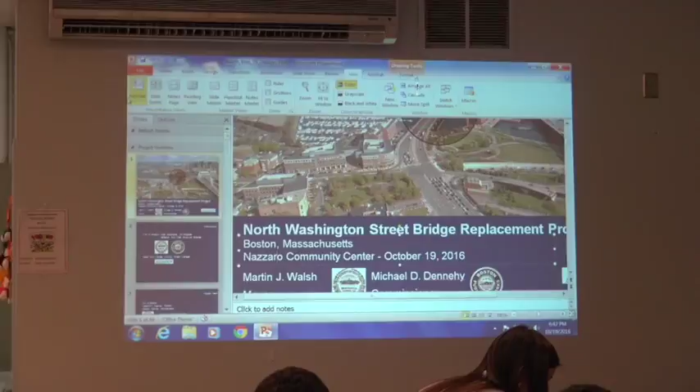So let me start showing you some slides. It takes a trained person to operate these things. Left and right, left and right.

All right, North Washington Street Bridge. The project limit is from the Keany Square intersection to the City Square intersection at Charlestown. This project entails the replacement construction of a total 1,500-foot bridge.

The span we're replacing is about 1,100 feet under this project, and this bridge has been in service since 1898. It has been loyally serving the citizens of Boston for the last 118 years.

Obviously, with that age, this structure is somewhat exhausted, and it's evidenced when you are traveling on the bridge. You can see concrete patches, steel plates, traffic drums and cones.

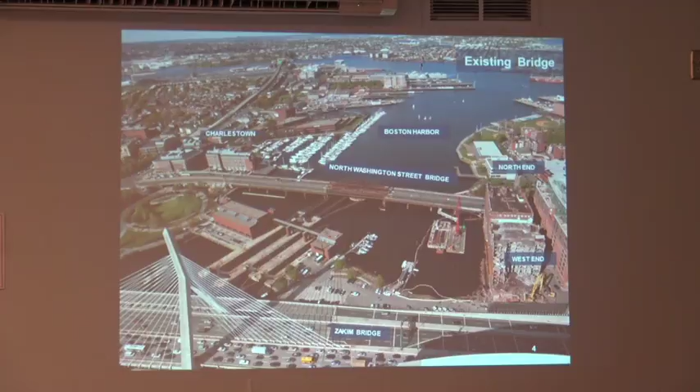Unseen by the public eyes are steel structural members below the bridge deck that support this structure, and they are also in a very deteriorated condition. So we monitor the structure almost daily. As a matter of fact, we have a crew out there doing repair as we speak tonight, and a bigger steel repair contract was advertised on Monday. We're going to keep the structure working until the bridge is replaced.

So it's basically a structure that we must replace. As a result, the city and the Public Works Department's utmost goal is to get this project under construction as soon as possible. Right now, we're targeting next year to have the construction contract going.

The project goal is pretty simple. If I can put it simply, we're designing the replacement bridge for the next 75 to 100 years. As a result, we're projecting what we will need in the next century as the bridge serves future generations.

So now I would like to turn this presentation to our design consultant, who will go through some of the details of the design and the comparison between the 25% design and the currently 75% design level.

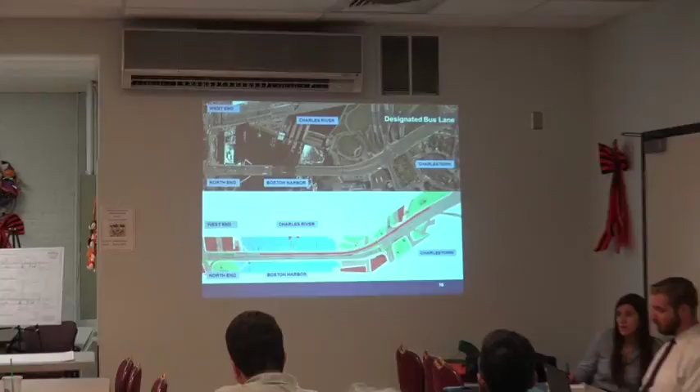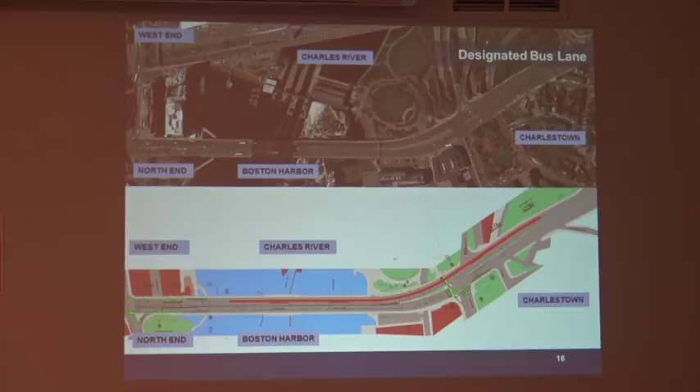So within our project, we widened the bridge roadway slightly and narrowed the sidewalks a little bit from where we had them before. That allowed us to add a bus lane starting 500 feet north of City Square and ending 500 feet north of Keany Square. City planners can take this and build onto it, extending south and extending north.

These slides are to relay where the bus lane starts and why we started it there. This is the City Square tunnel coming off north of the bridge. Currently it's 4 lanes going south, and then you add 1 more or 2 more coming off the Tobin Bridge.

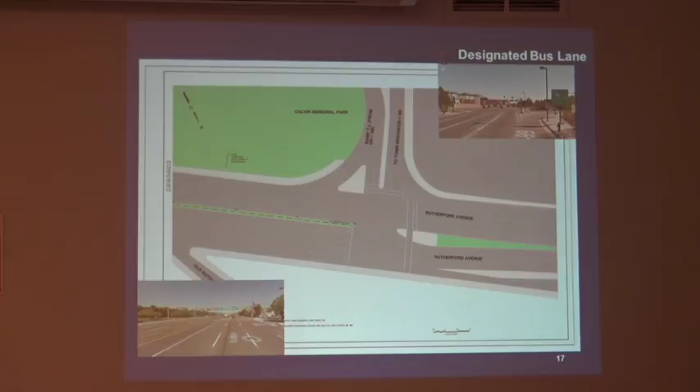So then we hit this point, 500 feet north of City Square, and we force people to make a decision at this point whether to go straight or go to the right lane. It gets the cars in line where they want to go.

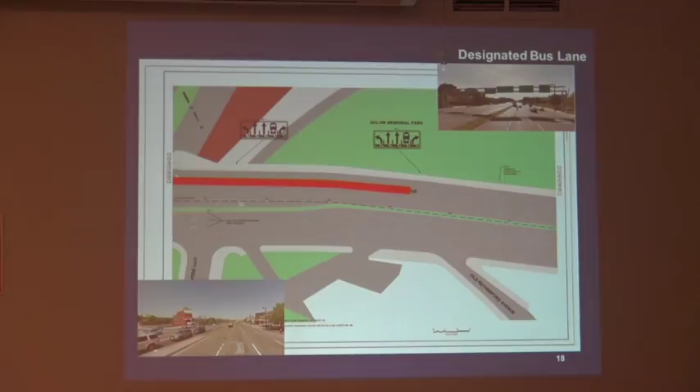I know right now at City Square, you have 4 lanes going down to 2, and it's a mess. I understand that. This at least will get people where they should go, and instead of the bottleneck being on the bridge, it sets it back further up north.

This is City Square. The bus route has its own lane through the intersection.

This shows, let's see if I point there, this is Chelsea Street going to Charlestown. Southbound we have 2 through lanes and a left turn lane. Once you get across the intersection, you have the 2 through lanes and the bus lane that continues south, and this is also where our separated bike lane can start.

We revised this intersection slightly to improve safety for the turning lane here. There's a blind spot, so this slows the turn down and protects the bikes.

So north is to the right. This is continuing onto the bridge. Same bus lane, the 2 lanes coming south, and 2 lanes going north on the other side.

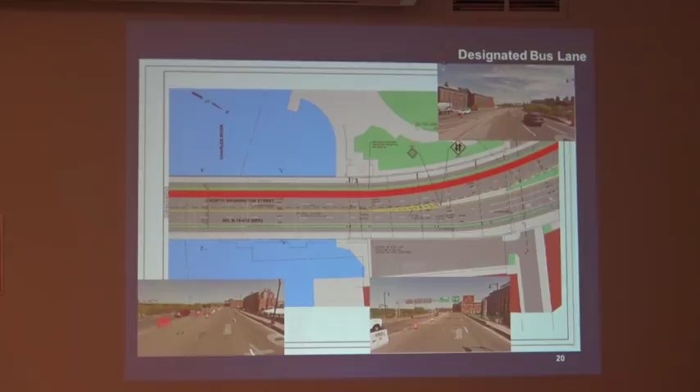We cross the main span of the bridge. The bus lane stops about 500 feet north of Keany Square, which allows people to get to the lane they want, whether a right turn or a left turn.

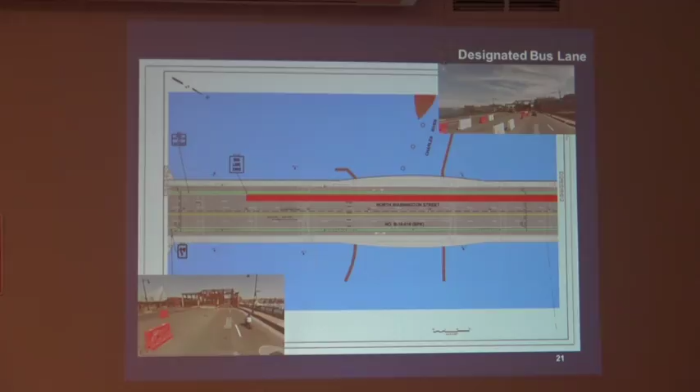This is the way it worked. Originally, we had the bikes crossing the right turn lane, so cyclists wouldn't get hit by someone turning right. That was the way we used to do things a year ago. Now we're keeping the bikes to the right, which is more comfortable and feels better next to the sidewalk, but we have to introduce a bike signal as well as this blank out block.

So this, I don't know if you can see it as a sample, it's a blank out block. When the bikes have a green light, the right turn lane has no turn on red, it has a red light for the right turn lane, to avoid any conflicts between the right turns and the bikes.

Going northbound, we start the bike lane along the right curb. I'll bring these slides back. So it just continues to the north. That bike lane goes to the north. And then we open up.

One change we did was we extended the bike lane across the intersection, and that can be picked up eventually by the Department of Ed project. We also gave the bike a separated protected turn to go to Charlestown. This will have a signal for the bike so that there's no conflict with the right turn.

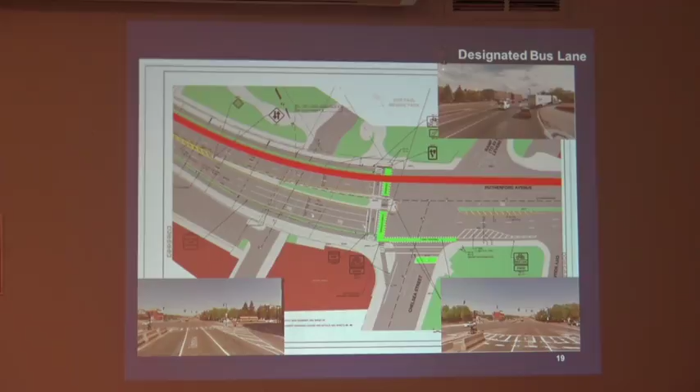This is just an aerial view of the current condition of City Square. This is one right turn that we're moving so cars can't go too fast around this corner. This slows them down and avoids the blind spot there, and provides an island protecting the cyclists.

Our architect is here. I'll have him explain the vision behind the plantings and the trees and the structure itself, much better than I can.

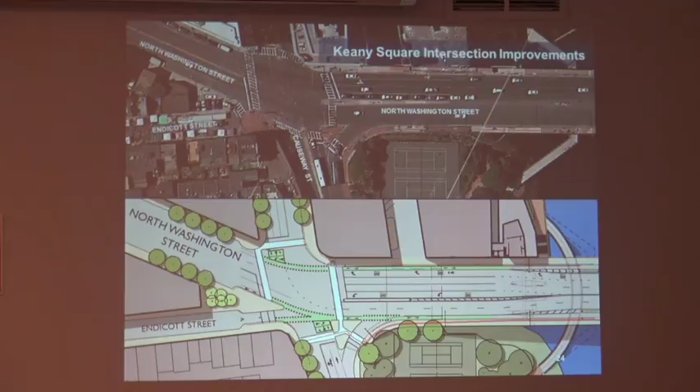This is Keany Square. Currently there's a right turn lane southbound, two throughs, and a left turn lane. We're maintaining this signal, which can only be tweaked without a major redo of the intersection.

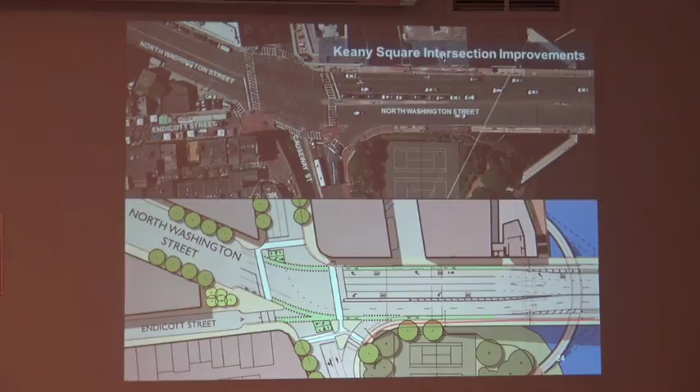Question: this looks different from the previous drawing you showed at Keany Square. There are bike boxes there, but they're in different places. Could you explain that? Is that from what I showed tonight or from the previous? No, you showed it tonight. It wasn't clear to me whether...

This one here, okay, yeah. More this one, green patches there, so 1, 2, 3, 4 bike boxes. See, it's moved. Yes, it is. So this one's out of date. I apologize, this one's up to date. This is the current one.

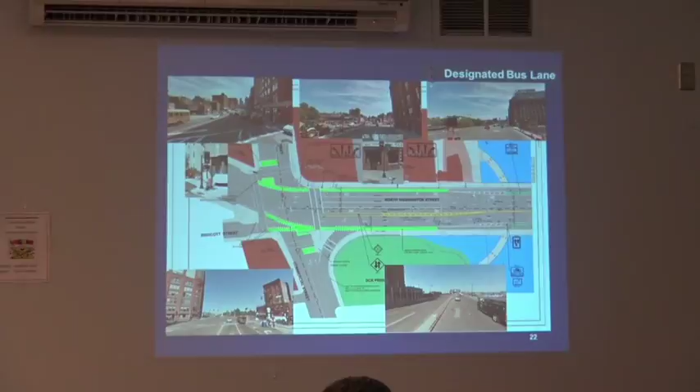I think it was probably updated based on the Crossroads, or sorry, the Connect Historic Boston project, where they have what looks like a bike box before the sidewalk and after the sidewalk. I believe that's the only difference.

So the bikes can choose which lane to go into, and this is a two-stage turn as well. Cyclists who want to take a left have to cross this road and wait in that box. And same thing for this, cyclists that want to go...

This area is tricky, even with the Connect Historic Boston project. I think what they did was provide cyclists two different ways to get through this intersection. The commuter or serious cyclists can go right through the intersection, and the family-oriented ones can go along the river walk, the harbor walk. Those are the two options cyclists have, and I think Connect Historic Boston is signing the project that way.

Yeah, they'll have signs that say Constitution, take a right. North Station, take a right as well.

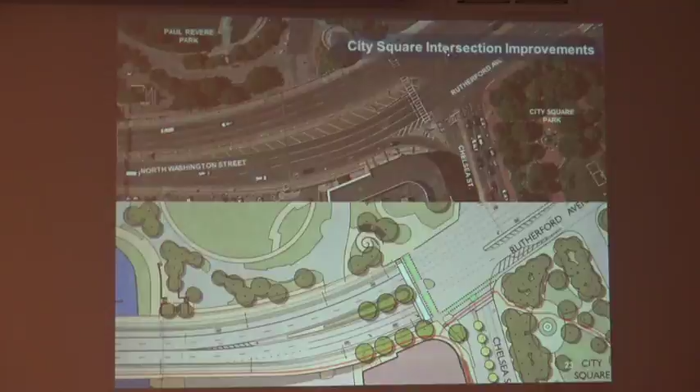Is there going to be any improvement of the harbor walk under there? Yes. We're going to replace it, and we're going to raise it up two and a half feet too, so it doesn't flood us out with a super king tide.

That's for global warming, right? It is, and Miguel can explain this too, but the existing bridge is really deep, the beams are deep, and that's why they had to make the walk extend as far out as they did and as low as they did, to get the vertical clearance while trying to stay above the high tide. So our new bridge is going to be nice, sleek, and narrow, and we'll be able to raise that walkway up and still have the clearance.

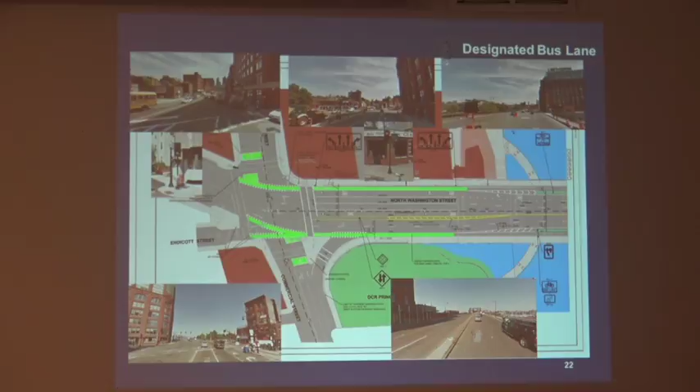This is the existing bridge on the approach spans, with 8-foot sidewalks and an 80-foot roadway.

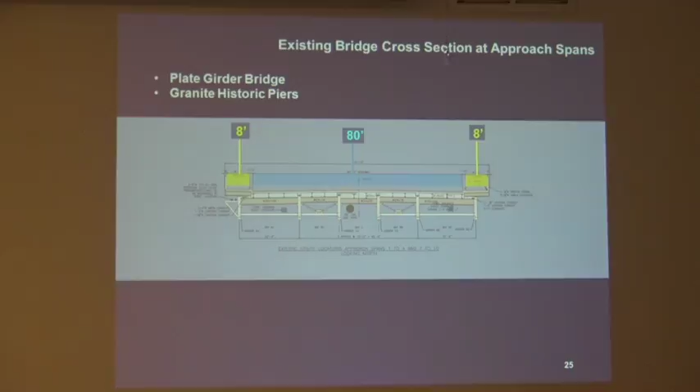This is the existing bridge when you get to the turntable that used to swing. There are three areas of traffic, used to be 2 lanes northbound, 2 lanes southbound, and 1 lane in each direction in the middle, which was closed in 2003 due to deterioration. It's still closed since then.

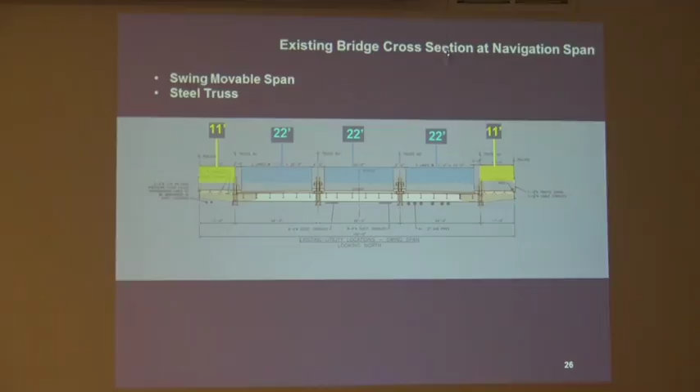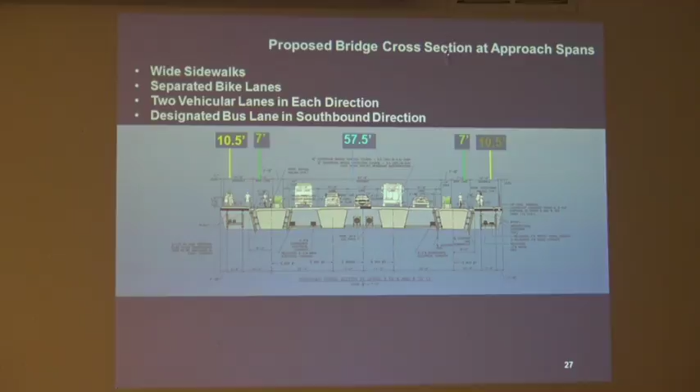Each lane is for each car, so the lanes do vary. To make this work, the opposing lanes are probably 11 feet, and the other ones are 10.5 feet.

So it's kind of a road diet. You can see we have drainage concerns. These trapezoidal boxes are the steel structure holding up the bridge, and we don't want to put a pipe through that for drainage, so the scuppers have to be outside of those. There are challenges in making everything work.

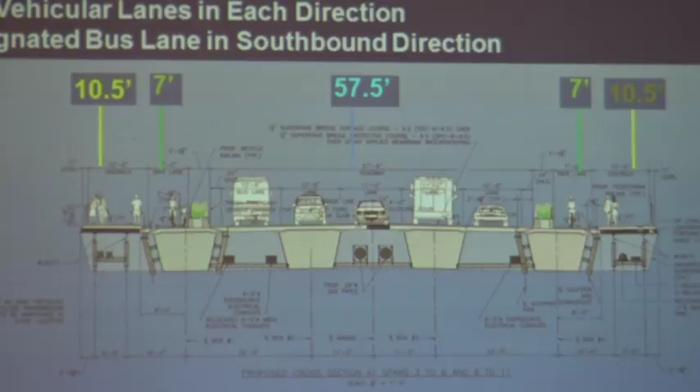So currently, because they're not 12-foot lanes and not 8 or 10-foot shoulders, it has a design waiver under review. I think we got a 2-foot shoulder that keeps the cars off the scuppers and the bus lane.

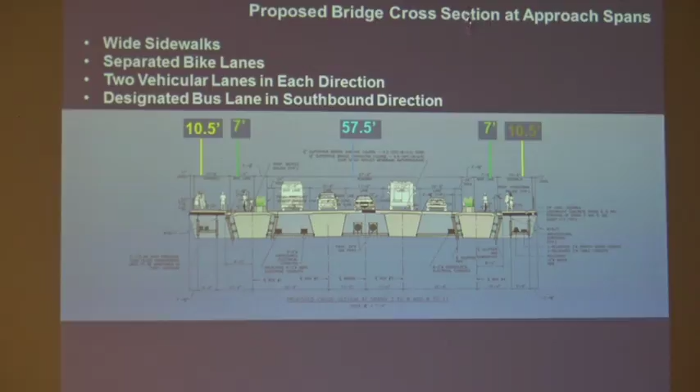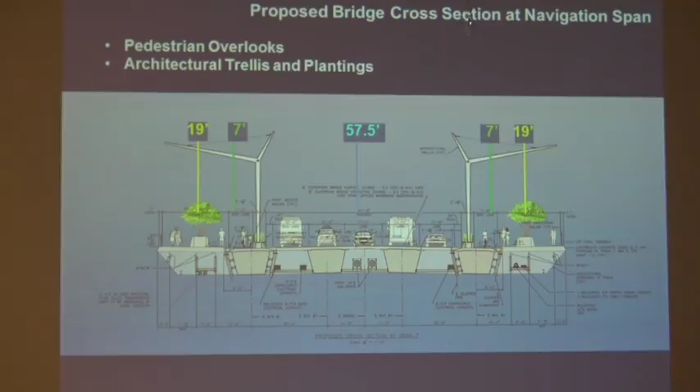This is as you cross the main crossing of the harbor. The sidewalks widen out to 19 feet, and there'll be trees, plants, benches, and plaques explaining the site that you see from that destination area.

But during construction, MassDOT has been increasingly getting the word out. I get emails every day about what's going on with Fall River, the Braga Bridge, the Longfellow Bridge. They're getting better at getting the word out.

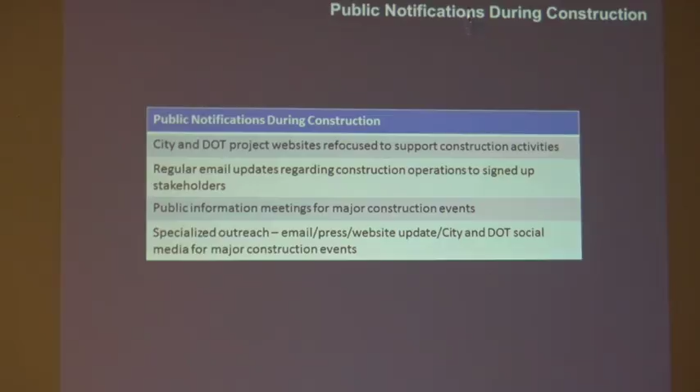North Washington Street Bridge under construction, so it'll be like lanes shifting today. There'll be websites to get the word out about what's going on, email updates, and public information meetings throughout construction. That was part of the thought, to get the word out.

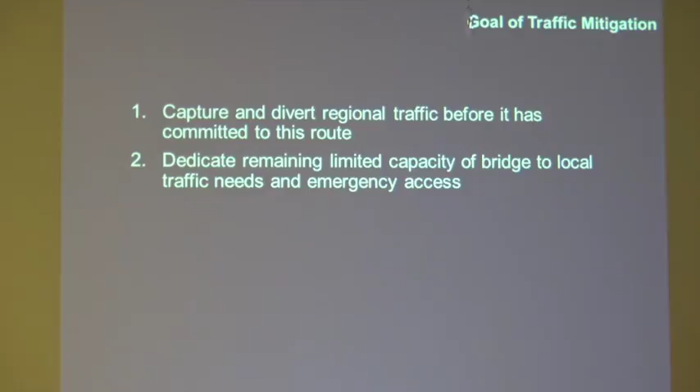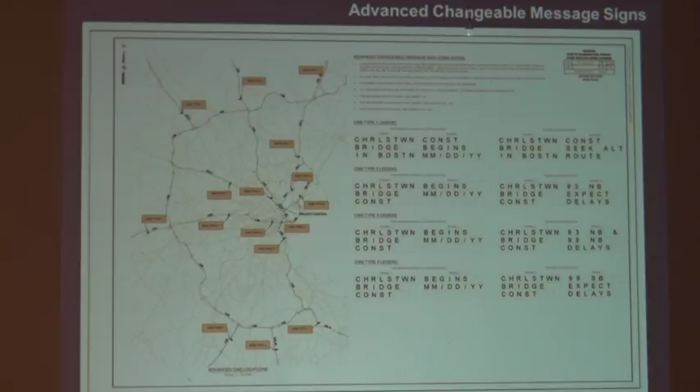128 will have all these variable message signs that say North Washington Street Bridge under construction, seek alternate route. This shows how many variable message signs we'd like to put out there. As they get closer, especially for wide loads, we'll provide alternate routes so people who don't need to come here can find another route.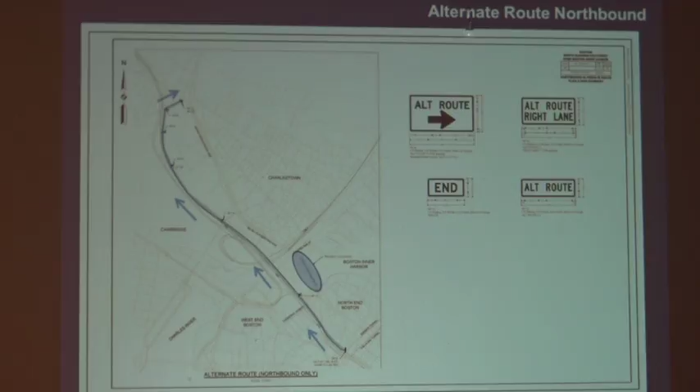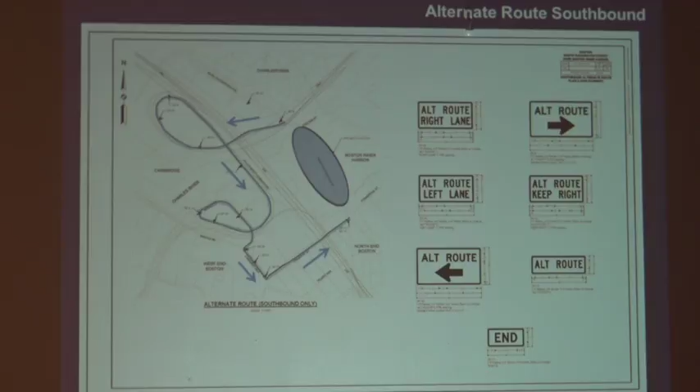This one, I believe, is for the northbound hazardous cargo. This is for the southbound alternate route, going over the Leverett connector. This one is for the hazardous cargo. This construction sequencing shows how we're going to handle traffic.

I have a last question. Do you plan on contacting any GPS services to have them reroute their GPS away from that area, like Google Maps or Garmin? I just wrote that down. It's all about DOT projects not doing much if everybody's just going to follow the GPS.

Okay Mike, can we legally do that? We've done that, actually, on Fast 14, as a matter of fact, on 93. So we've learned the lesson the hard way on the DOT side, so yeah, we are doing that now.

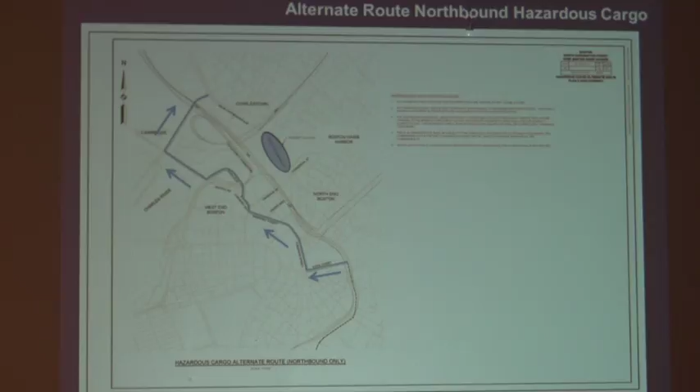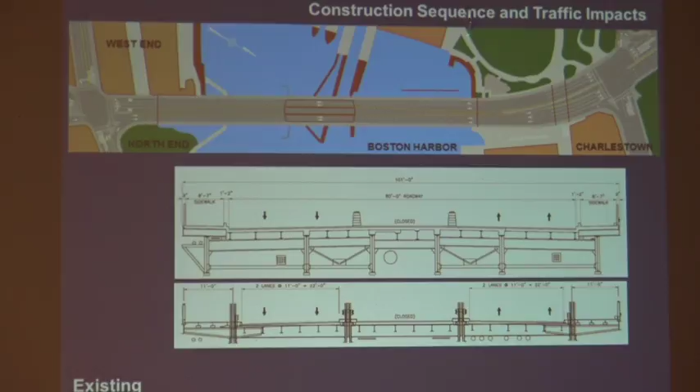So this is the construction staging. This hasn't changed, so this presentation is on the website. If you've seen it at the public hearing, it's the same. This is existing conditions, 2 lanes in, 2 lanes out.

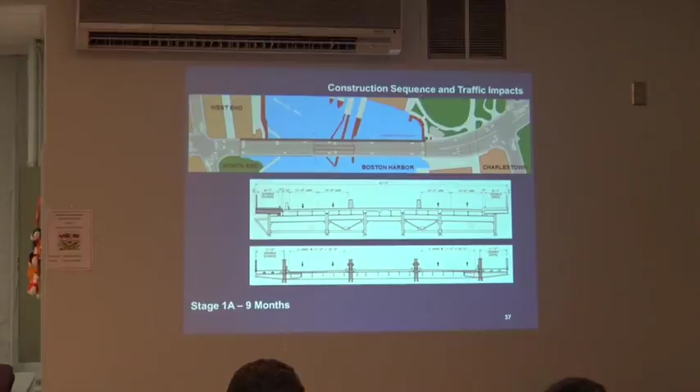This shows our first stage. There's a lot of utilities on this bridge, so before we impact traffic too much, we're going to do as much work up front as we can to get all the utilities onto that west sidewalk. This shows the first stage is to close the west sidewalk, demolish it, and create a temporary utility bridge that will support utilities and then act as a sidewalk again.

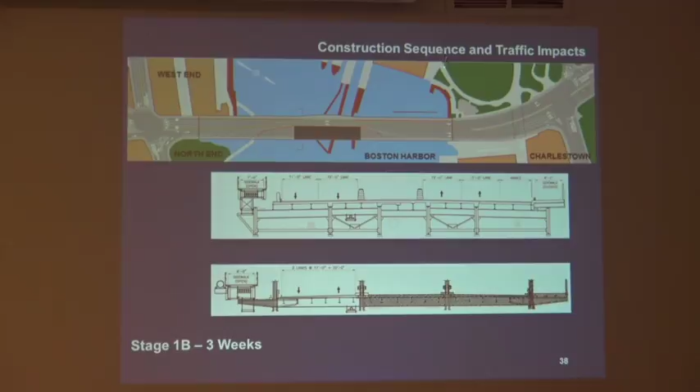This shows the temporary utility bridge, holding the utilities and acting as a sidewalk as well. The top one is the approach span, this is the main swing span. This one is the tough stage.

We anticipate 3 weeks. We can work with the contractor and the public, I'm assuming 3 weeks in August, where we can live with 1 lane northbound and 1 lane southbound. The reason we have to do this is because of the existing swing span. This center bay is inaccessible, it's deteriorated beyond repair.

This bay is where we can strengthen and keep it for this short duration. This is where the utilities are, and some of the utilities we cannot move, their transmission lines have to stay on all the time. The purpose of this 3 weeks is to demolish the center bay of the truss and the east bay of the truss.

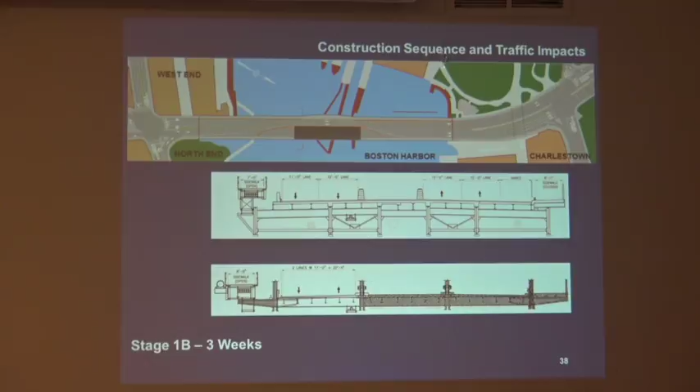And that allows us to put in a temporary bridge, like you see, maybe echoing the Bailey or World War II temporary bridges that they used. This allows us to go back to 2 lanes in and 1 lane out, as well as a sidewalk.

And this allows for our first major construction. We can demolish the west half of the bridge and construct our new one.

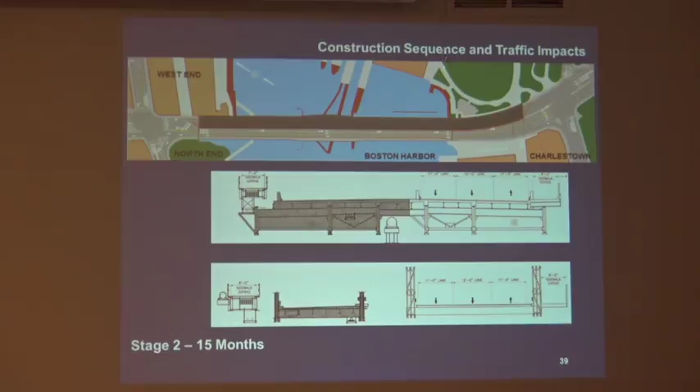At this point, you have two sidewalks, one for utilities on one side and a temporary one on the other. As much as we can, though there are times we'll have to close this sidewalk, we'll have at least one sidewalk open all the time. During this stage, we have to cross the Freedom Trail and all pedestrians to this side. This side we'll keep open whenever we can, because the park's there, the Commerce headquarters is there, and the access to the wharf is there.

Then we build the west half of the bridge. We can't build this sidewalk yet because our utilities are there. We get to demolish the east half of the bridge, the whole length, and construct the new bridge, the whole length.

So this is another major construction. We have two lanes coming in and one lane going out, and one sidewalk over. This is when we have to cross everyone to the west.

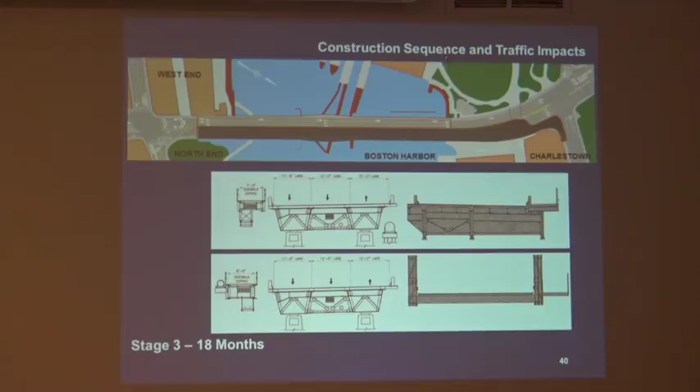Then there are two cleanup stages. So this is where we can open it up to two lanes each way.

It's not finally done because we have to build our west sidewalk. But the east sidewalk is open, the east bike lane is open, two lanes northbound, two lanes southbound, and we have to sneak in the rest of our bridge around the utilities.

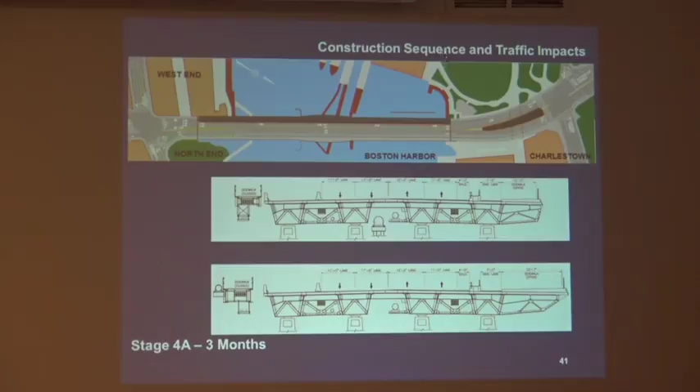And there's the final condition.

For construction duration, we're shooting for advertisement for construction late this spring into 2017. We want the contractor on board by the fall of 2017.

And we're looking at three to four years, depending on the work time. It is a trade-off. If we have the contractor work eight hours a day, only days and sometimes off-peak, then that's the four years.

But we appreciate flexibility. If they can work two shifts, they can obviously cut that time duration down. So this is where your input, from you who actually live here and are going to survive this time, is good for us to know.

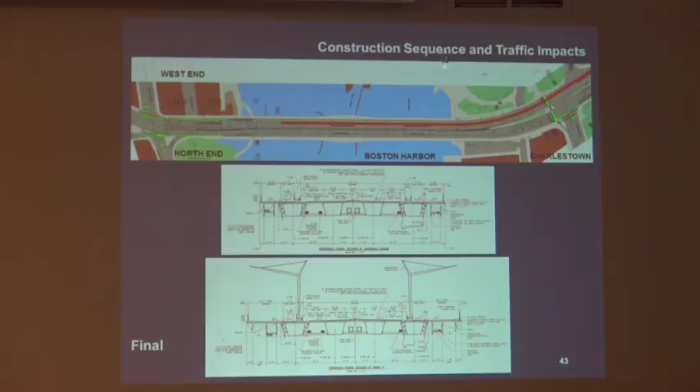We're opening up the navigation spans instead of having that big 85-foot diameter turntable. There'll be a single navigation span, and the crossing will be marked by architectural features.

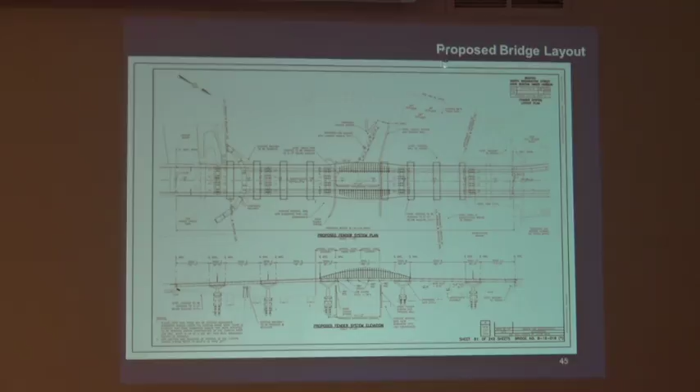And I'll let Miguel, our architect, Miguel Rosales, explain the vision for this project, how we got to where we are, and then we can answer questions.

Excuse me, I have a question and a comment if you don't mind. Okay. Keany Square, I'm not clear on — are we still keeping the left turn to go onto Atlantic Ave? Keany Square, yes. Okay, yes.

And I hope for the future — both ends are going to be a traffic nightmare, and I hope you are now contacting Boston Police to get permanent details there for protection after construction.

During construction, right, we have allotted — we've heard public outreach concerns about the police, concerns about people blocking at North Station, blocking the Causeway Street. The problem is if it's a detail, they have to sign up for it.

I think a project this size, it should be mandatory that it's part of their job. Somebody should be there on both ends. We've talked about this, but...

This lady is bringing something that is absolutely spot on. It's an ongoing concern for all of us to make sure the wonderful people from the police department are as engaged as possible. We've started a series of conversations with the Boston Police, soon with the state police, because there's the waterside that needs to be managed, the roadway, and we're hopeful they understand the criticality of their ongoing committed participation so it can be as smooth as possible. So we have started those conversations.

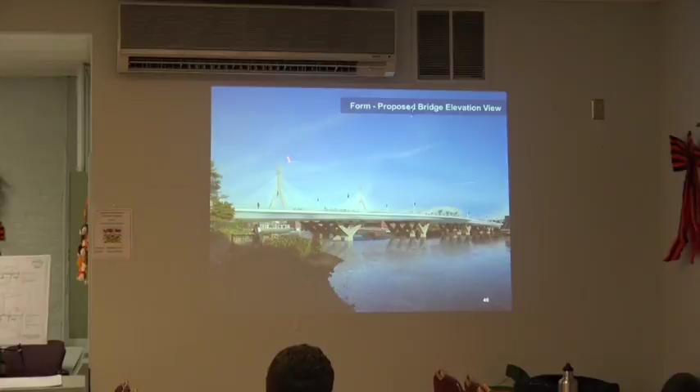This bridge is very important, as you imagine. It's the last bridge that you see coming from the Charles River into the harbor. One of the important considerations here was trying to make a bridge that would relate visually to the Zakim Bridge. We tried to work with the geometries of both of them, so we took the tower and inversed it, and tried to always use a triangular system and very clean lines like the Zakim Bridge, because we wanted to work on them together.

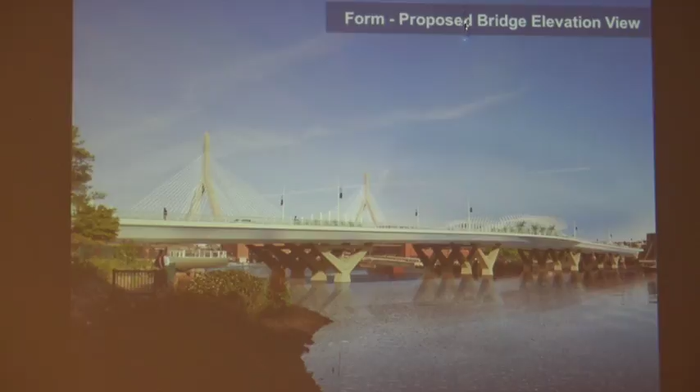The bridge is a constant depth, and much thinner than what you have right now. Right now the bridge is much deeper, probably about 10 feet, with huge granite piers so you cannot see through, you cannot see the water, it's a complete barrier. So it's going to be completely open, reducing the number of piers, and much more open to see the waterfront.

The city wanted to make a bridge that would be a role model for other bridges, not only here in Massachusetts but throughout the United States, with a very multimodal approach. It's serving not only cars, but also buses, pedestrians, and bicyclists, because that's really the future of transportation. You cannot keep relying on cars more and more. You need to distribute the circulation to different modes.

That's why we have a bike lane that would actually be the widest bike lane on a bridge in Massachusetts, at 7 feet, which would allow you to pass each other. So if you're a commuter and want to go faster, you're able to do that. Then the sidewalks are quite wide, and we have the bus lane, which makes it truly multimodal.

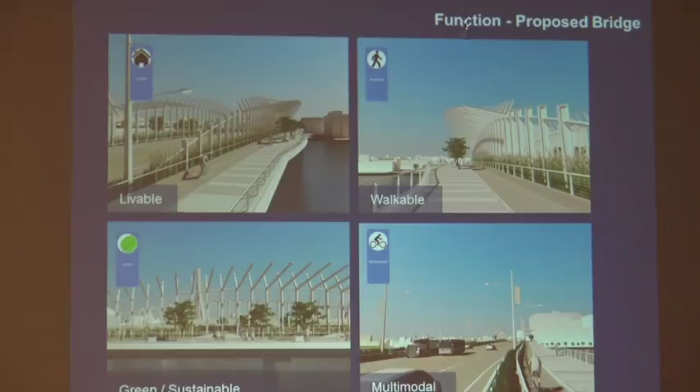We also wanted to make it very walkable, so at the center of the span you have very wide sidewalks, about 20 feet wide, and you'll be able to sit and look out. This is the nicest place to be when you cross the bridge, because you're at the highest point, with a very nice panorama of the whole harbor — right now people are so distracted with the cars and the openings on the deck that you actually don't see the water. That's going to change and make it much better for that purpose.

We feel that this bridge should talk about the future and the past also. From the bridge you can see all of these important landmarks: the Bunker Hill Monument, the U.S.S. Constitution, the Old North Church, the Zakim Bridge, the Boston Garden, and the Boston Custom House Tower. It would be nice that when you are on the bridge looking at the landmark, you can read about it and learn about the history.

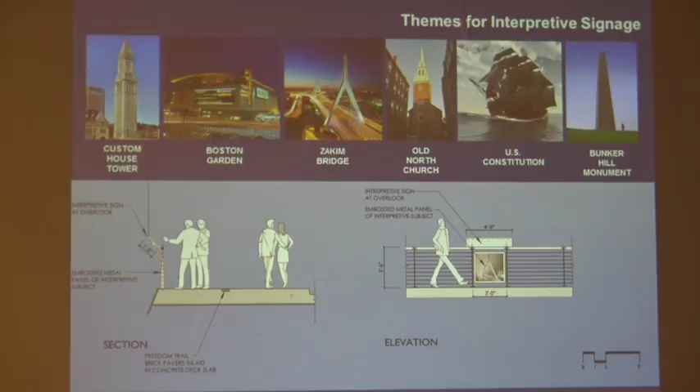So we will have historic plaques at the center of the span that will explain and have photographs of all of these structures, kind of making it like an outdoor museum, because this bridge has the most tourists due to the Freedom Trail. You have a lot of tourists crossing it on a daily basis, so that will be some information that the project will provide.

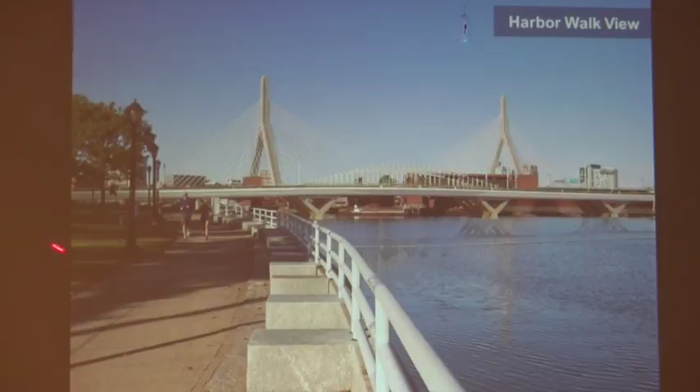That's another view from a distance. The whole underside of the bridge right now is cluttered with a lot of utilities, not very nice to look underneath. What we're planning to do is enclose all the utilities, with a screening system at the bottom of the structure, allowing maintenance people to walk from one side to the other rather than relying on a barge all the time — a major benefit for maintenance. Aesthetically, you'll also have a clean underside, with no pigeons and no openings with pipes showing. That will really help.

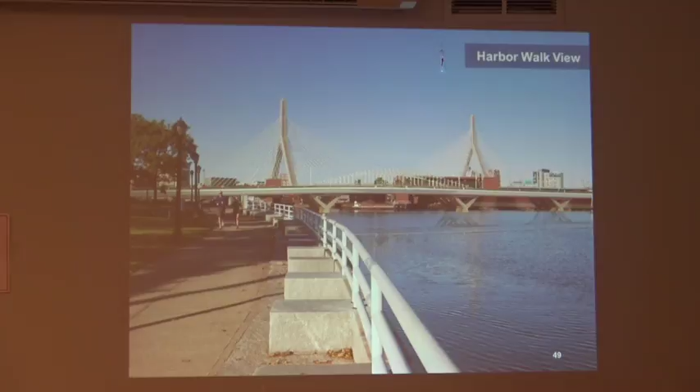That's another view from a distance. We thought it was important to relate to the cable system, so that way you see these angles matching. The Zakim Bridge very quickly became an icon of Boston — it's in many of the postcards, and I was lucky to work on the Zakim Bridge, and I'm lucky to work on this bridge too. We tried to make it compatible, especially when you see both of them together from far away.

That will make a huge difference in the perception of crossing the bridge, because you'll have something green to look at. And we're going to make very hard sure that the plants live. So the city is working with a lot of people trying to get some maintenance support. When the plants go in, every year there are places they die, but we will use hardy plants.

But it will be quite unique. There's very few bridges in the US that have plants. You are lucky actually to get this one. So it's quite a unique feature.

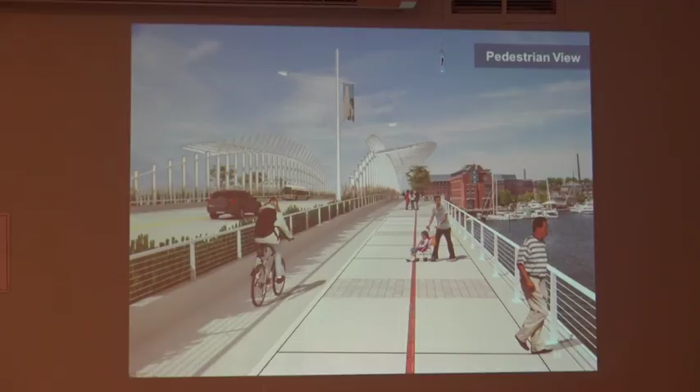Once you are here, we created this structure, which creates like a sense of place. We wanted to do something similar to what you have here in the North End, which you have a pergola, but on the bridge. So you can sit and look out and relax. People, when they are crossing and they are elderly, the bridge is very long. It would be nice to have a place where you can stop before you continue.

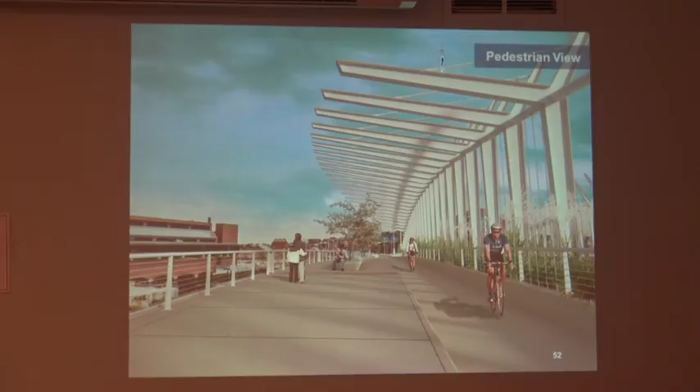This structure will be illuminated at night, and we'll be able to change the colors. We have coordinated the lighting system between this bridge and the Zakim Bridge, so if the Zakim Bridge has a color, we'll have the same color. They will match. This is when you're crossing the structure.

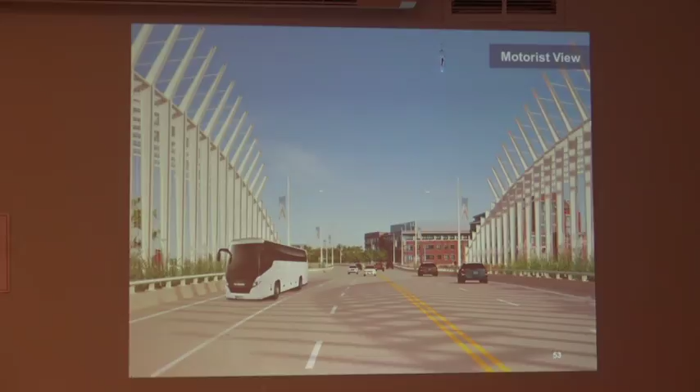This is the bus lane. Again, very few bridges have a dedicated bus lane in the US. I think that's special for this bridge. It's going to allow the bus to speed up and not stay stuck with the traffic. You're coming in the direction.

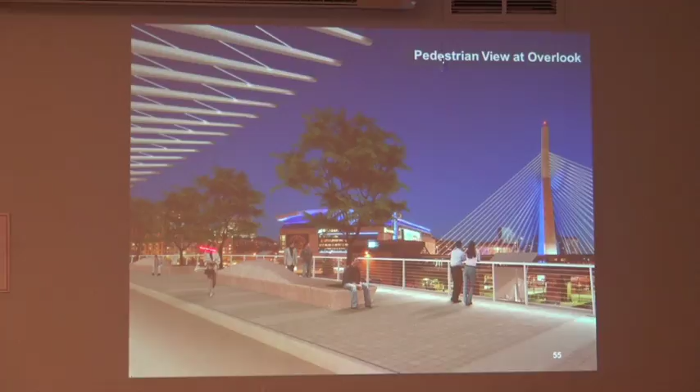At night, as I was mentioning, we'll coordinate the lighting. All of these lanes will be illuminated. The railing will be illuminated also, so you will feel very safe. Right now, there is basically no pedestrian lighting on the bridge. This is going to be completely different. There will be both railing lighting and lighting from the overhead, so both lines will be part of the system.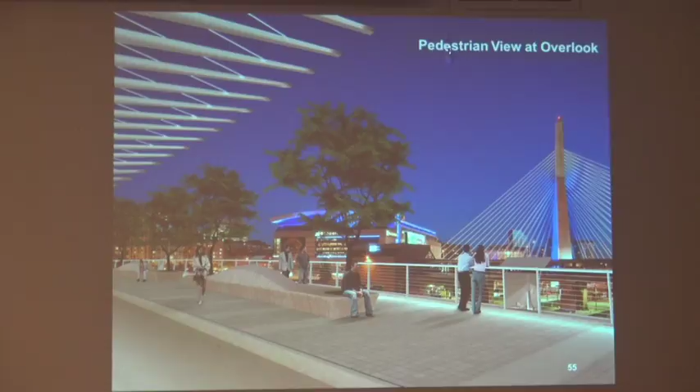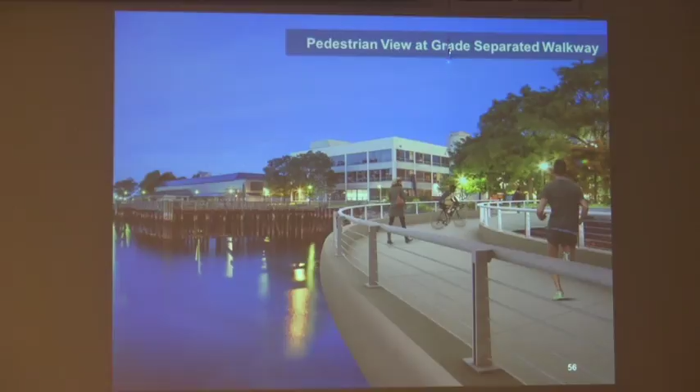This is the curved walkway. Right now, the walkway is very low and it has a weird angle. Now it's going to be more smooth and cleaner. We'll also have lighting in the railing, which is LED lighting that doesn't have a lot of maintenance. They put some lighting in the existing bridge, but of course it's broken, because it was a different system.

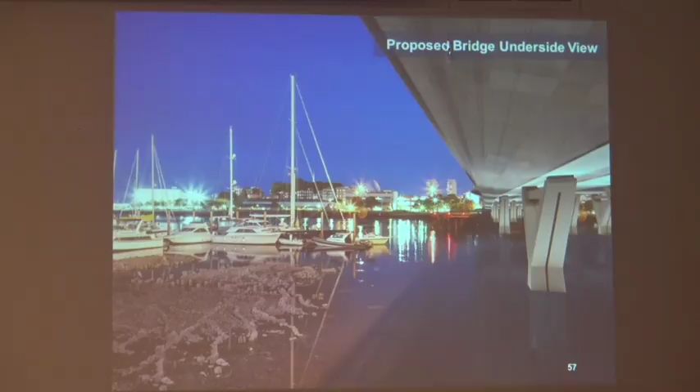And there's another view of the bridge. I know it's going to take time to finish it, and you're probably going to have a lot of issues, traffic and other issues. But I think at the end you're going to have a very nice bridge, and you're going to be proud of it, and it should last for a long time. So, we hope you're patient, but you have a good result at the end. Thank you very much.

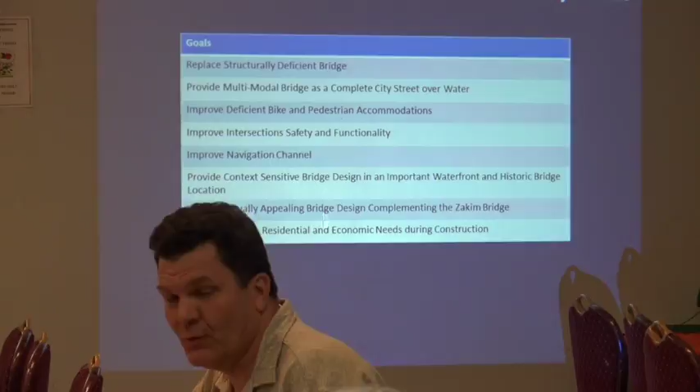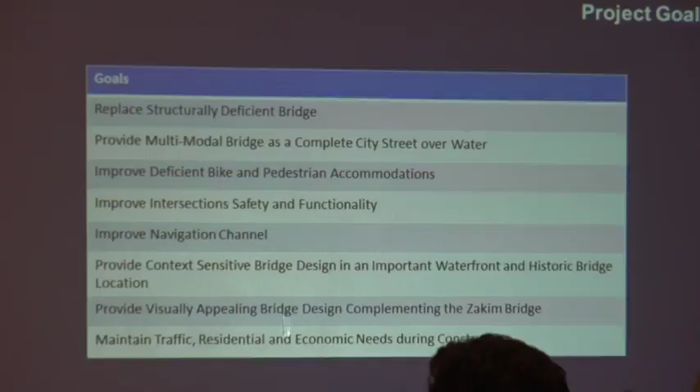Okay, I was concerned that there was a goal missing from up here. My name's Dave Goggins, I'm with the North End Waterfront Residents Association, and I've participated in several of the public meetings for the last, I guess, 3 years. Having been to those meetings, I know that one of the concerns continually raised was traffic mitigation. Right now we're dealing with a bridge that has 4 lanes and is woefully inadequate to meet the current traffic needs of both sides of the bridge, Charlestown and the North End waterfront downtown area.

Traffic's a nightmare on both ends. And I don't see anything here that talks about traffic mitigation, how this new construction of this bridge is going to alleviate the current problems we have, much less the future problems we're going to have with all the development that continues to go around on both sides of the bridge.

And the elephant in the room that no one seems to have addressed, at least in the meetings I've attended, is the bottleneck on the Charlestown side. You're going from 4 lanes of traffic to 2 lanes of traffic, and that's still going to be the case after the design of this bridge currently.

You talk about it being multimodal, that it's going to alleviate traffic concerns. How is a partial bus lane that doesn't connect to the Haymarket bus terminus going to solve any commuting problems? The bus lane as it's configured now pushes the bottleneck further into Charlestown, and creates a new bottleneck in the North End at the bottom of the bridge. That doesn't solve any problems. How can you call this a multimodal bridge when there's nothing that enhances public transportation?